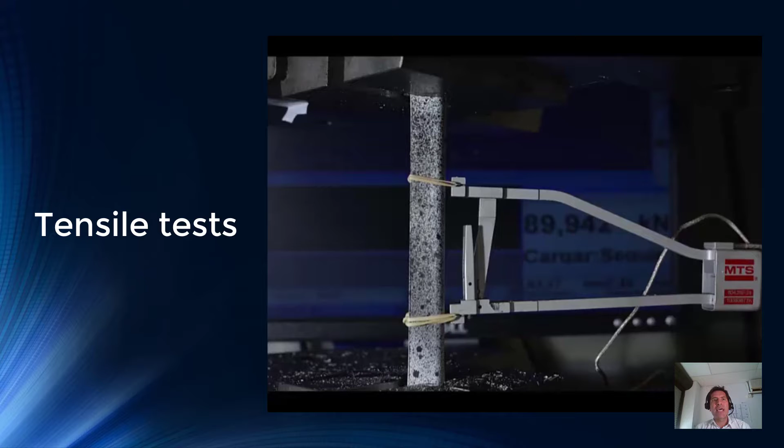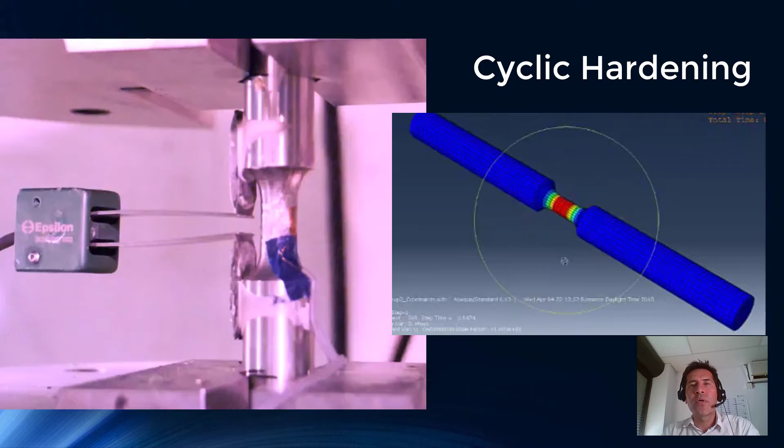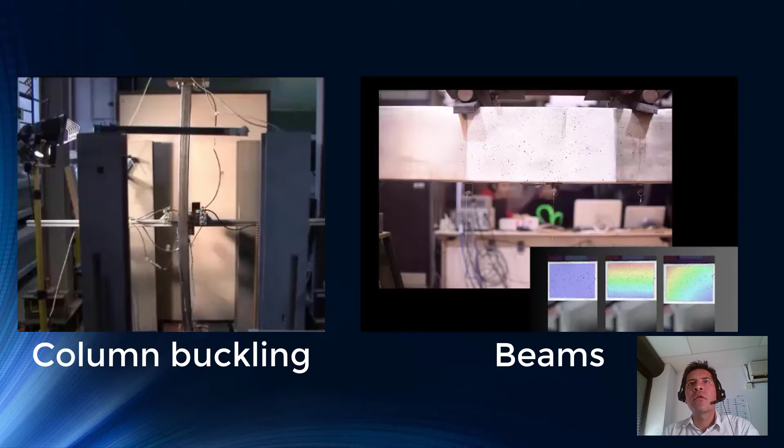This investigation belongs to a vaster project on structural behavior of stainless steel frames subjected to static and accidental loading. This is a national project that has already ended, in which different types of structural tests of austenitic stainless steel elements were performed. For instance, we performed tests on tensile members, also tests on rectangular hollow sections using different cross-sectional classification, material tests on cyclic loading in which cyclic hardening was studied, members, columns and beams with different cross-sectional classification subjected to compression and bending, and frames subjected to horizontal and vertical loading.

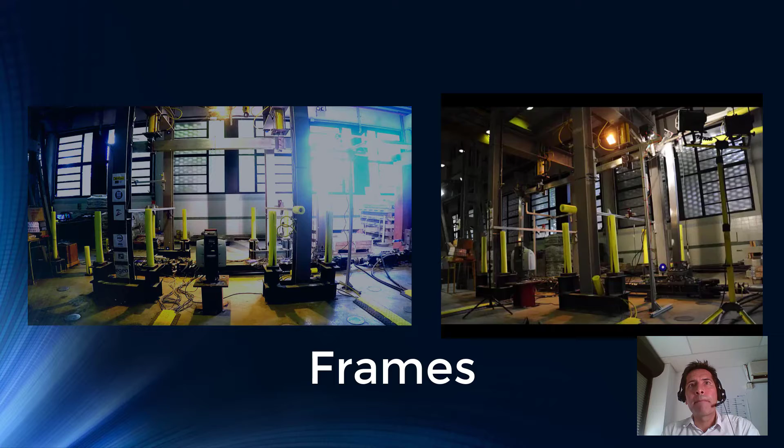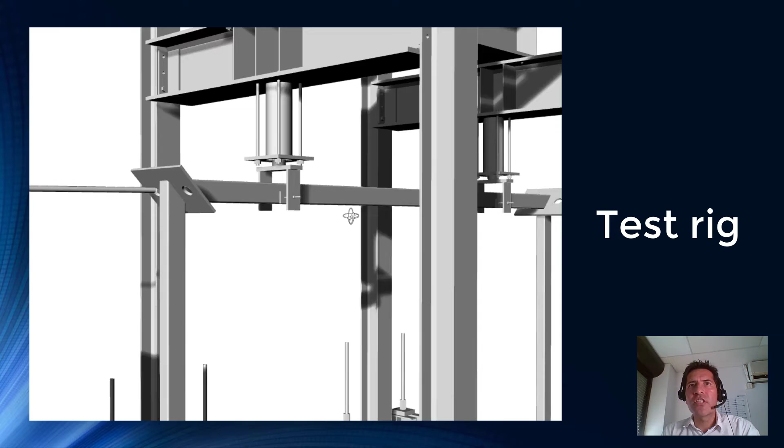This was one of the most ambitious tests performed in steel structures at our lab facilities, in which the test configuration included the application of load vertically using jacks, but also the application of horizontal loads on the base of that frame.

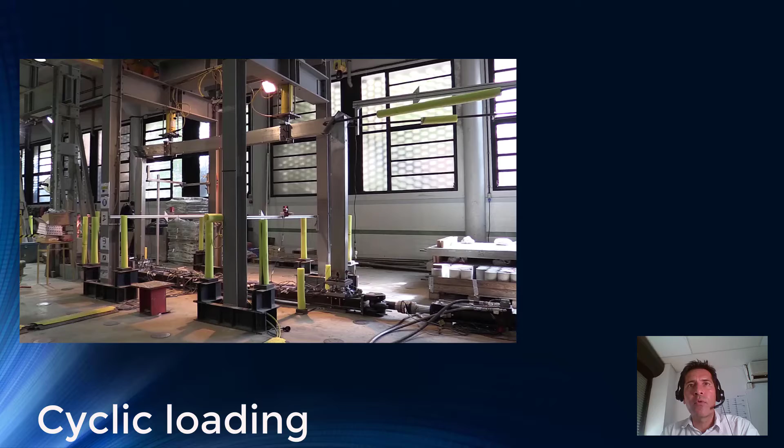Using horizontal jacks, this also allowed us to perform cyclic loading testing, in which horizontal cyclic load was applied, as you can see in the video.

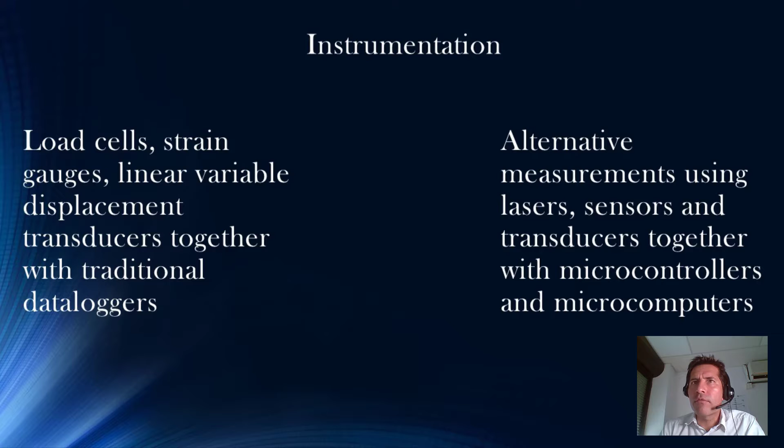Two types of instrumentation were applied: traditional, using traditional data loggers, and alternative, using microcontrollers and microcomputers. This was fundamental for the development of alternative IoT platforms, LiDAR systems, and virtual reality and augmented reality systems for laboratory facilities, with an open, interoperable, BIM-enabled philosophy, accessible also to a broader audience.

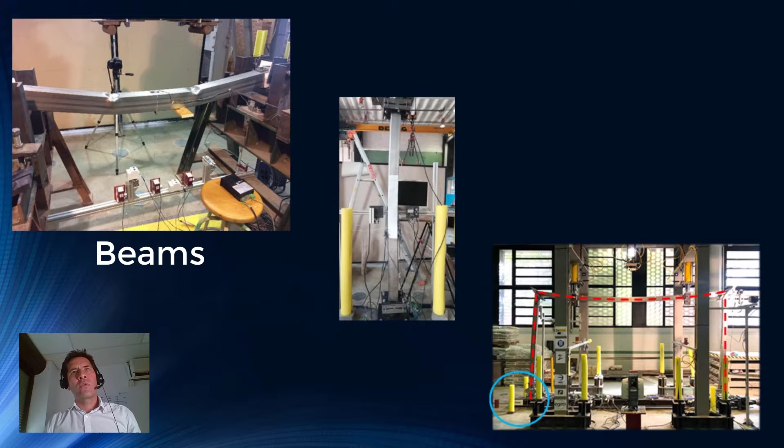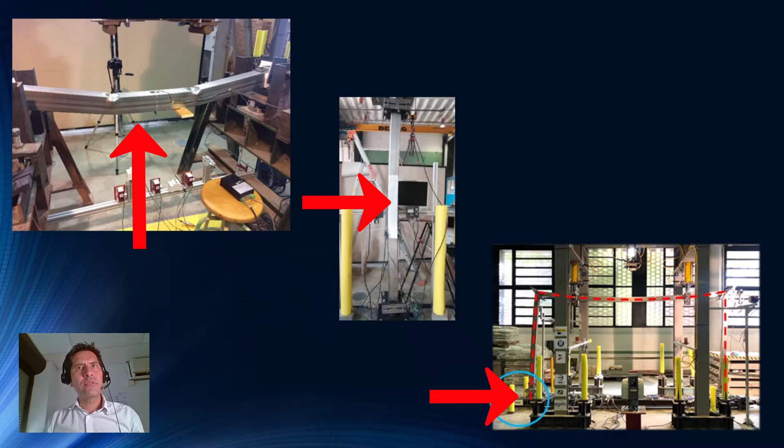So let's describe these systems. The first case is the IoT platform for lab facilities. Using members and frames, we instrumented the beams, the columns, and the frames with displacement sensors, lasers, and ultrasonic sensors in order to measure deflection, out-of-plane displacement, and in-plane displacement of the frame.

These measurements were sent to a developed platform, IoT, called Camin Smart Lab, which is now available at our school for any researcher or student, in which with a sensor they can connect this experiment to this cloud-based platform for researchers and students, and they can allocate all necessary files and measurements in real time. It uses an interoperable format compatible with open source systems.

And the second part corresponds to the terrestrial laser scanner, scan to BIM. The use of a TLS during the test on the stainless steel frames was aimed at measuring displacements prior to and during testing. So automatic usage of these results as built input in geometrically nonlinear analysis was the aim.

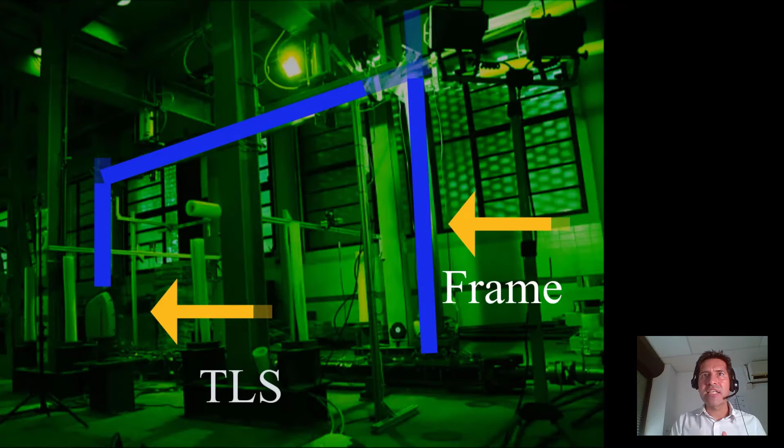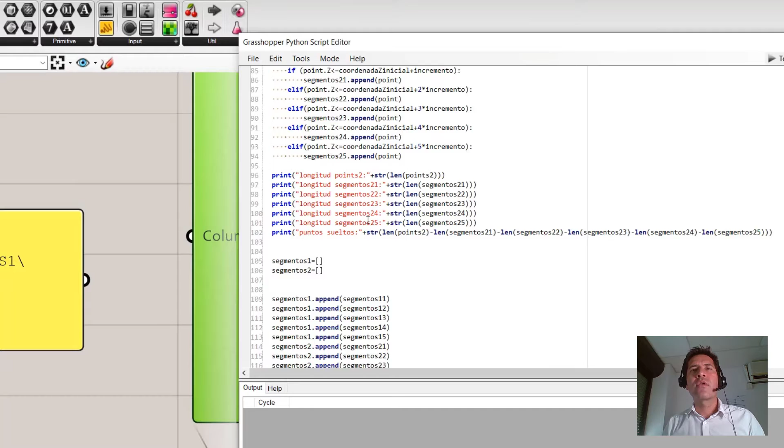Here we can see the frame being tested and the terrestrial laser scanner scanning the structure, given a number of points. A cloud of thousands of points was exported to post-process. Rhino, Grasshopper, and Python were used for post-processing techniques, in which computational geometry was used to treat this information using Python, developed in-house coding, in which we identified these surfaces, these clouds.

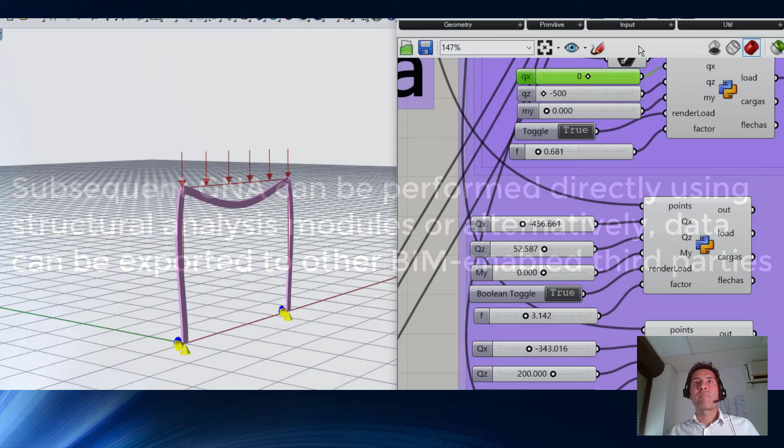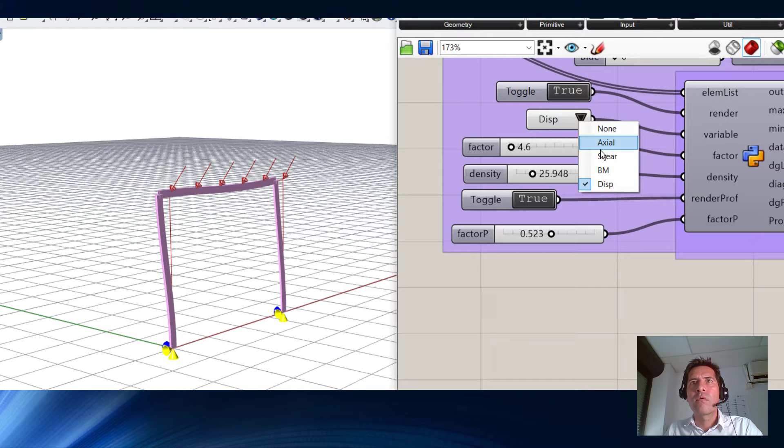These clouds were transformed into lines that were used subsequently in models, which are the models we understand for geometrically nonlinear analysis, in which beam elements are used, and structural analysis is then performed on such type of reproductions. Here you can see the model already under loading, with different visualization of results in real time as well.

The third part is the development of virtual and augmented reality systems tested on those frames and members. The aim was to develop a real-time enriched visualization of the test for two types of users: a remote user and a user at the lab. Virtual reality for the former, augmented reality for the latter.

The system proved useful for three different collectives at the research group: researchers, technicians, and students. It also used an interoperable format compatible with open source measurement systems and microcontrollers, in which structural models were solved in real time using different computing platforms.

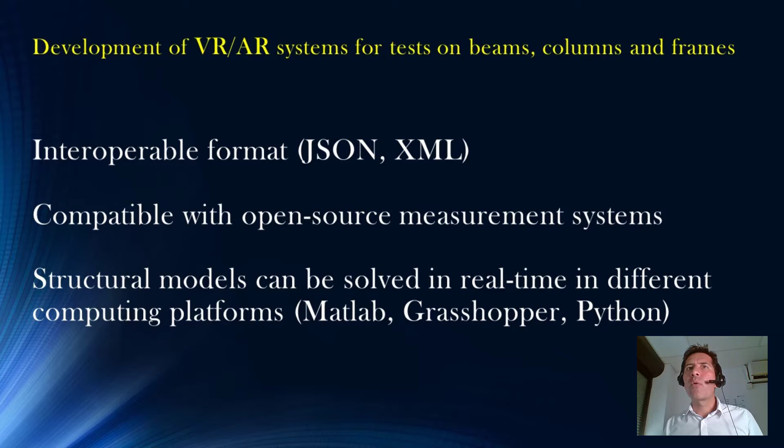Let's have a look at the virtual reality, which is a synthetic reproduction of the lab. We need for that a helmet in which an immersive synthetic environment is reproduced. This is a reproduction of the laboratory facilities and also real-time data processing from those sensors, giving information to the model.

The user could see in real time the deflection of the beams and the deflection of the columns, in this case out-of-plane displacement. This was an immersive synthetic environment.

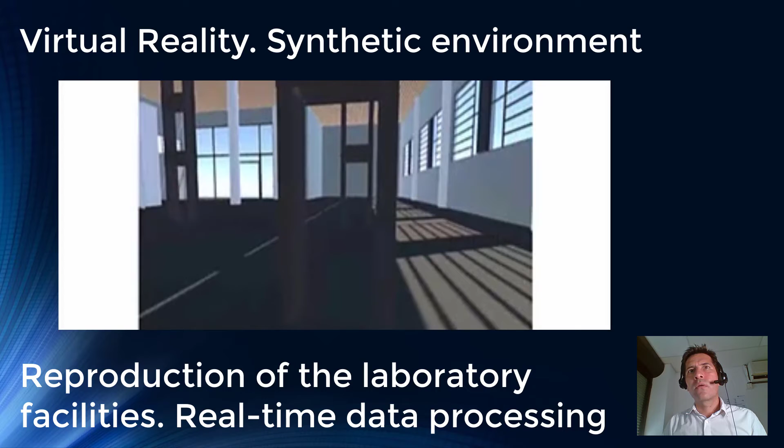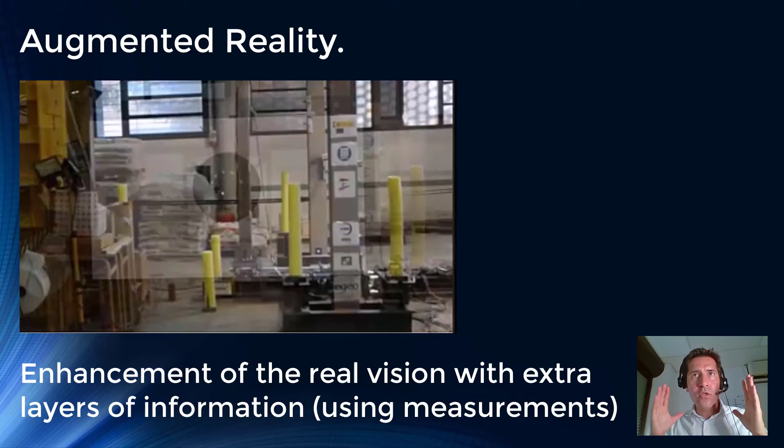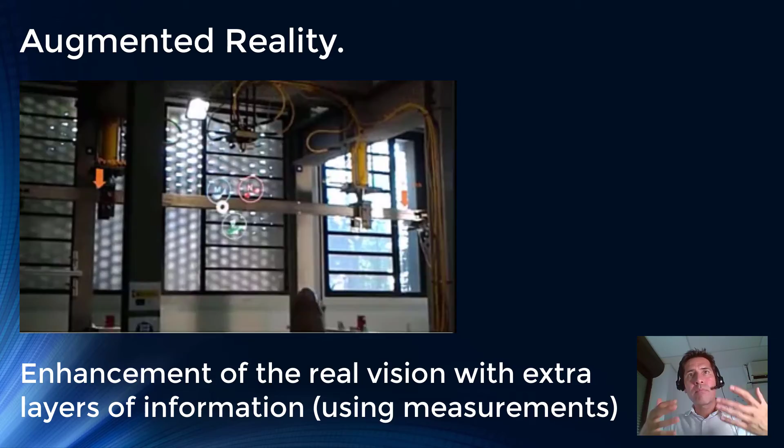On the other hand, the augmented reality, which is an enrichment of the naked eye vision during the test, using measurements and using glasses called HoloLens. With these glasses, the user can see the real laboratory, but on top of the real laboratory there is a layer of information that provides graphs, plots, lines, numbers, arrows about bending moment, axial forces, displacements, reactions, and meaningful information in real time.

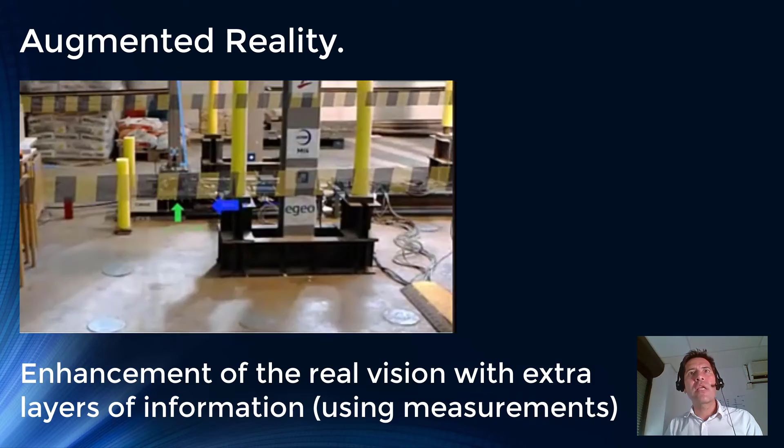This information is directly linked to the model that is calculated in real time with the sensor information.

So let's have a look at the key takeaways of what we have done concerning interoperability in three different lines. First, sensor to cloud using interoperable format, JSON XML. Second, scan to BIM using computational geometry for treating this information of a point cloud. And third, sensor to analysis using different user interfaces in real time, such as VR, AR.

So one can see in these three lines a left to right, let's say, transmission of information: sensor to cloud, scan to BIM, sensor to analysis.

But this is important, this is possible, this has been performed here. But also one of the key takeaways is that the flow of information can also be not only horizontal but also vertical.

When I mean vertical, I mean that the information can also go from the cloud to the BIM, from the cloud to the analysis, from the BIM to the user interfaces, and vice versa.

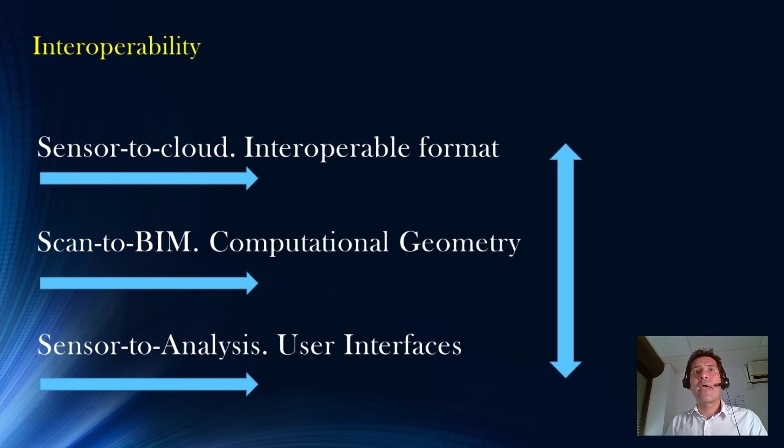And all of this is meaningful when it comes to the new trends in construction. These new trends in construction are going beyond BIM, and this is a need in practical construction 4.0.

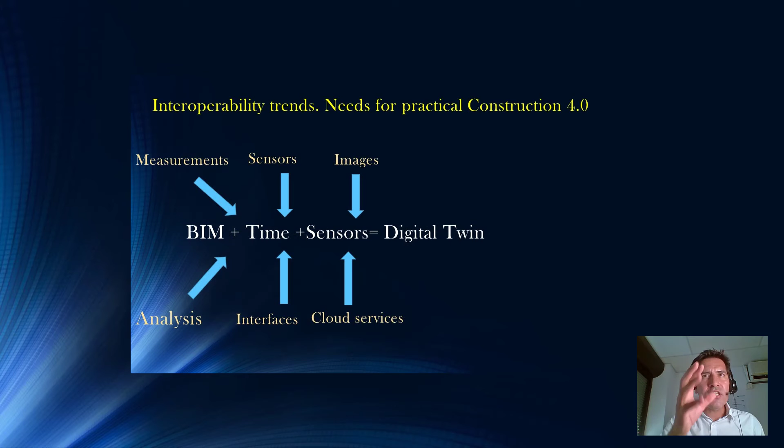In which BIM plus time plus sensors is generating the so-called digital twin of the structure, which is a new, or relatively new, concept, in which measurements, sensors, images, analysis, interfaces, and cloud services all together are enabling the development of this concept of digital twin in the realm of steel or in general structures.

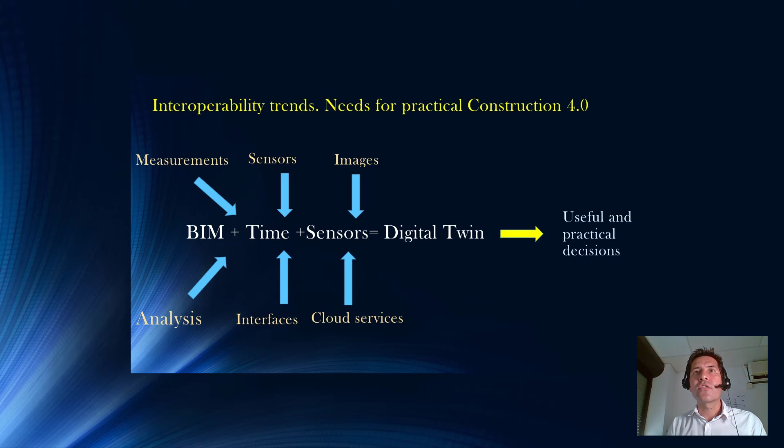We need to use this digital twin concept for taking decisions, and so we need useful and practical ways of representing these decisions for engineers. That's a new challenge. But interoperability-wise, we see this as what were islands we knew before, in which all islands were well developed. Now in this island of information, we can put information flowing from one island to another.

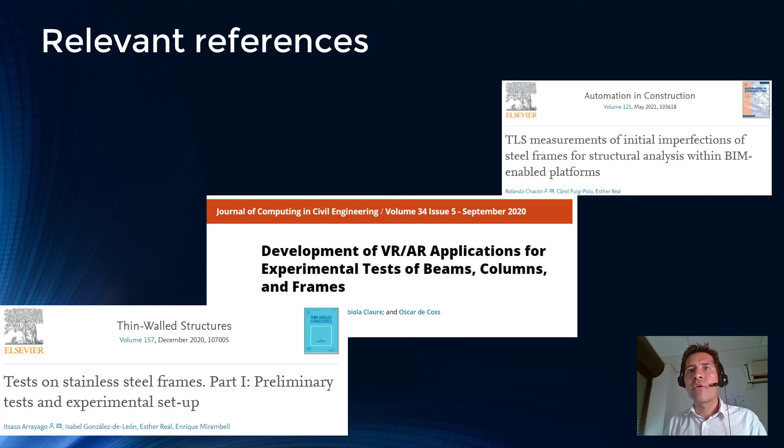Finally, we would like to point out some references about this work we have already published in journals, and we would like to acknowledge the great team working hard in this development of this experimental program, together with the collaborators that helped develop specific tools for this task, and the funding agencies for the project Pinox: stainless steel frames subjected to static and accidental loading.